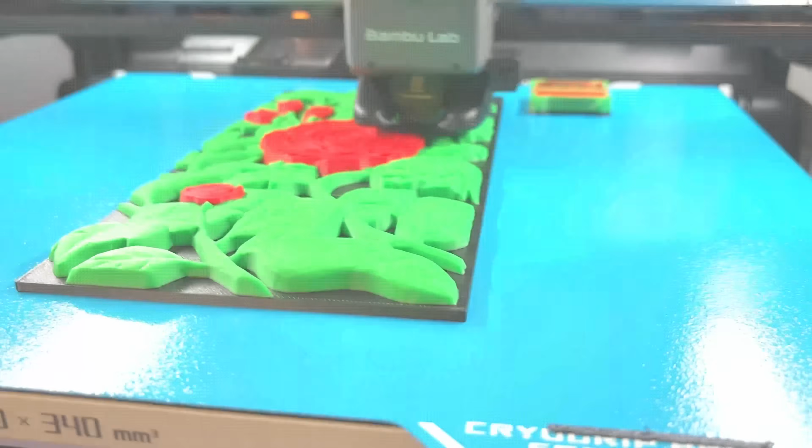In this video, I'm going to show you my workflow on how I use Hitem3D's new 3D relief tool feature to create this 3D printed multicolored piece. And trust me, it's fast and easy and requires no 3D modeling experience. So let's get into it.

The first thing you'll need is an account set up on the Hitem3D AI 3D modeling platform. You can find a link in the description. It's free to sign up and you should have enough credits to at least try this out for yourself without any charge. The second thing you'll need is a multicolor 3D printer, something like a Bambu Lab or an Anycubic printer. Any of the current modern printers usually have that capability. And that's basically all you need.

To make things simple, this video will also have chapters below, and it'll be broken up into 3 main sections. The first segment will cover the images that we need to actually use this 3D relief feature. The second segment will be diving into the Hitem3D AI platform, and the third and final section will be going into the Slicer software and then adding color and sending it to the print.

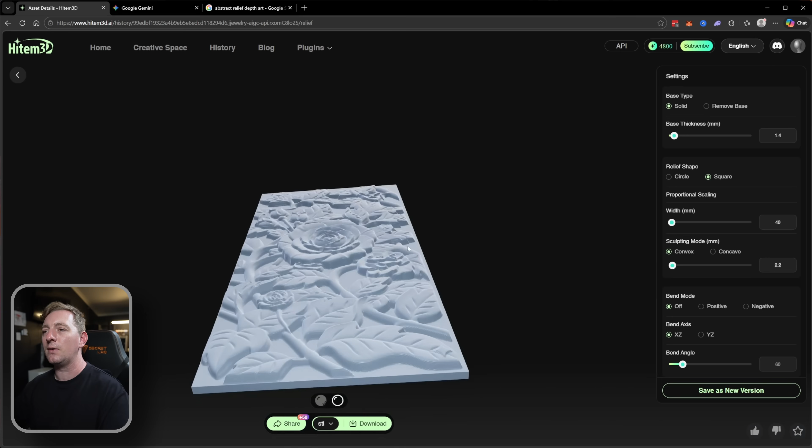I don't want it to be too deep, I just want a little bit of depth. Obviously, the more height there is, the longer this is going to take to 3D print, but not enough height is obviously going to take away all the work we're trying to do. So just play around with that setting, find somewhere that works best for your design. Let's say 2.2 should be fine.

And then finally, we have the bend mode. So instead of being a flat object, we can actually start to curve this around. Currently it's off, so it's just a flat object, but we could make that a positive curve, and you can see it's starting to bend around in that direction, or we could make it a negative curve, so it's now bending inwards.

And we can also change the bend axis as well. So instead of the XZ, we can go the YZ. So instead of bending around this way, we're now bending around that way. And finally, we can change the bend angle.

So we can go all the way to a full tube if we wanted to, or we could go to a positive and basically make part of a cup. That's a pretty cool feature, just doing it like that, bending it all the way around. But let's go back to our off.

And then finally, we need to export this. So down the bottom, we have our export. It's just in STL format, and we can click on download and give it a sec, and that will start downloading. And here is that other example I did with the two hands holding.

So again, we can just increase our thickness a little bit, play around with that. And I think that's fine. We might make this one a circle one like that. And then we will download this.

Okay, so that's it. That's how easy it is to create these 3D relief models. No modeling required, just chuck your image in, play with some settings, export, and then we can move on to the third and final segment. A little trickier, but I think the fun part, which is actually coloring the model and then 3D printing it. So let's get into those details.

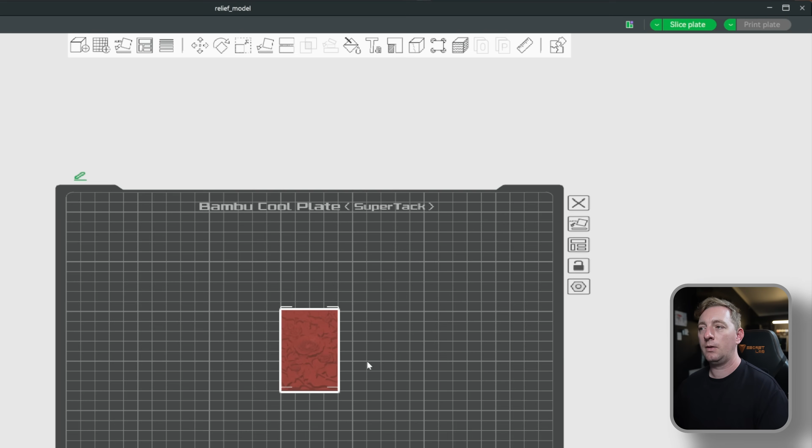So the first thing we need to do is go over to our Prepare tab, and then we need to import our model. So here it is now. Now this is a really small print, so let's scale that up a bit by going to our scale, and we can just increase this maybe 300%. That's probably a good size.

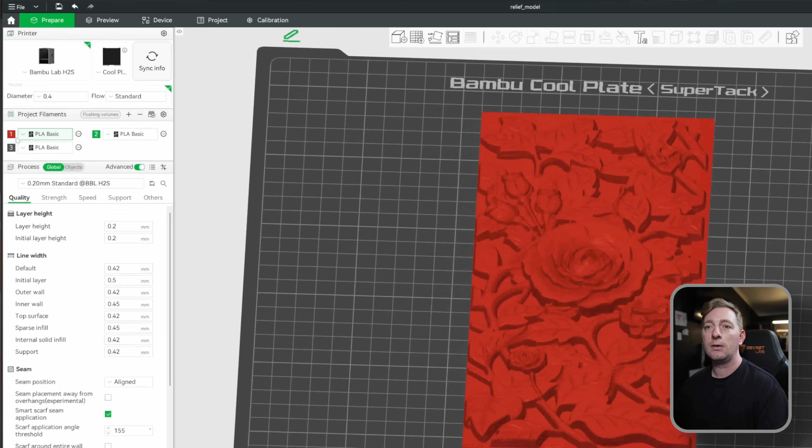We'll also need to set our filaments, which you can do by probably just syncing to your printer. That's what I've got loaded at the moment, but I want to change this around just to demonstrate. So we'll go to a PLA basic. Maybe I want the base to be a black. The second one, I'll want to use probably a green, and finally maybe a magenta color for the roses. So these are going to be the 3 colors I work with.

If you have a 4th color, or if you have multiple systems connected to give you even more colors, then go nuts. You can do all that yourself. But this will just give you the basic workflow to start with.

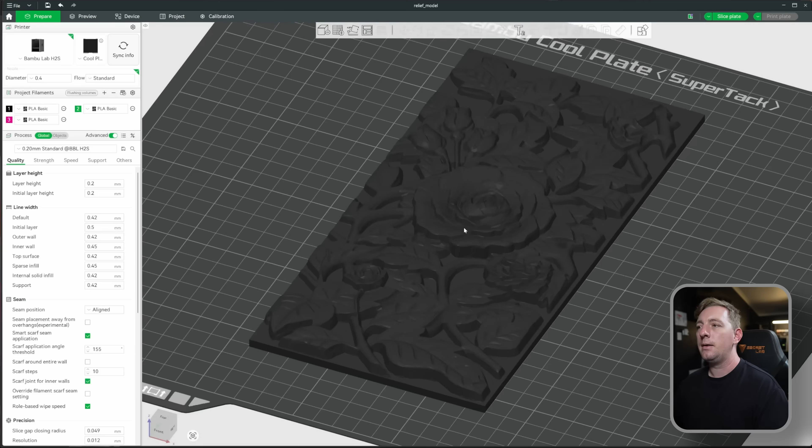Now we can click on our model and go to our painting tools, and we might want to start changing this to green. So you could change your pen size and start painting this in, but you can quickly notice this is going to get really difficult because you start getting overlapping where we don't want it to. We want to keep that base black. And so I found there's a better way of doing this. So we're going to undo that.

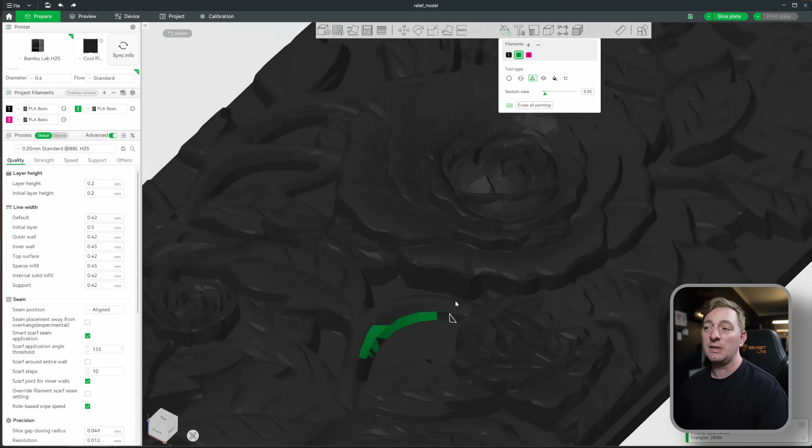We can also try triangles, but you can see these triangles are quite dense. And it's going to take a long time to go through and try and paint all those triangles accurately as well. So that's not a good way. You can try the fill feature and see how well it does, but honestly, it seems to just want to fill in the whole thing. So that's not going to be very good.

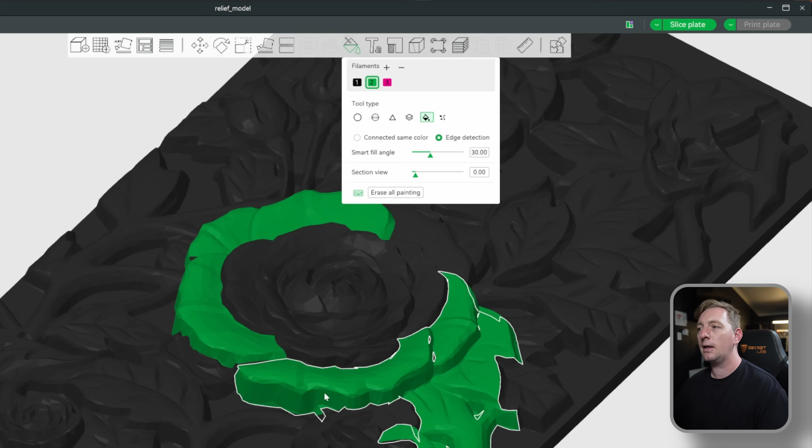We can change that to edge detection as well. But again, it's not really going to work for us in that case. It can work a little bit better here, but still it's cutting into it too much. So there's a trick to this, and let me show you what I like to do.

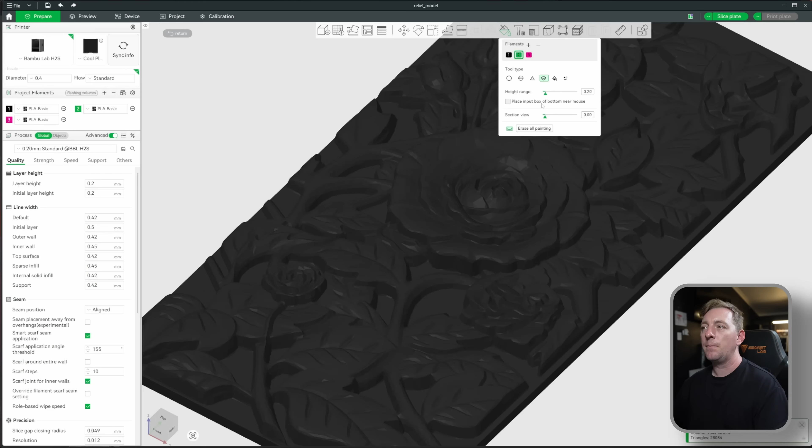So I like to use the height range, and this will basically color everything layer by layer to a height you specify. You can also tell it the range for the painting, which is your height range, and it will actually paint in whole chunks that way. But I like to keep it small, and then I can fine tune where I want it.

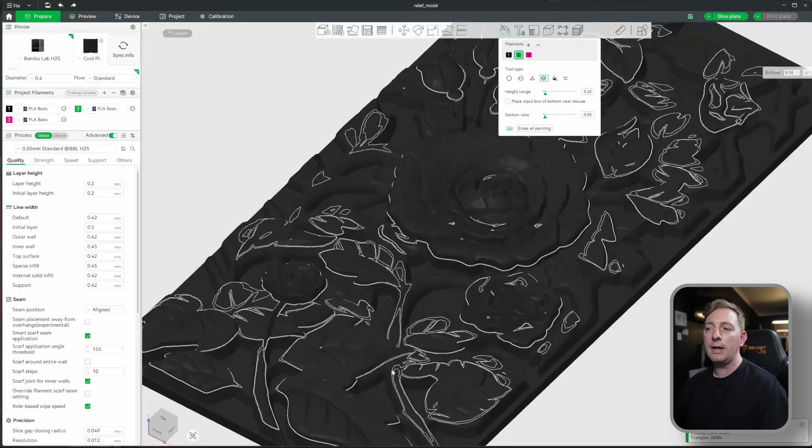The other trick is try and set your main color from the beginning. So what I mean by that is the black is going to be really easy to fill in with our height tool. All the rest, all the green parts are what's going to be the challenging part.

And so we're not sitting here trying to paint this whole thing in green like this. What we can do instead is we'll go back, we'll exit our painting mode. We'll actually change the whole model by clicking on it. And in this case, I've got number 2 is my green. So I can hit 2 on the keyboard and it changes the whole model to green.

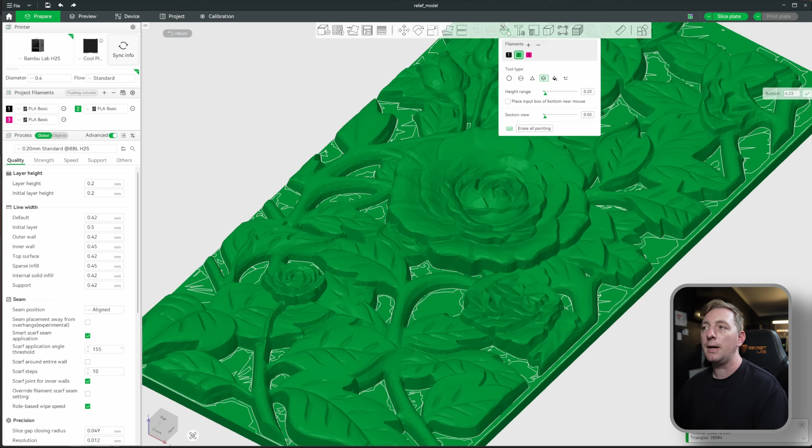And now we can go back to our painting tool using our layer, and we can switch to 1, which is my black. I'm going to look at the bottom of the model, and I'm just going to start slowly clicking and dragging up on the height. So you can see how it's kind of painting it as I go. And we can just go a little bit closer here because I want to basically just finish on this very final few layers where that transition starts.

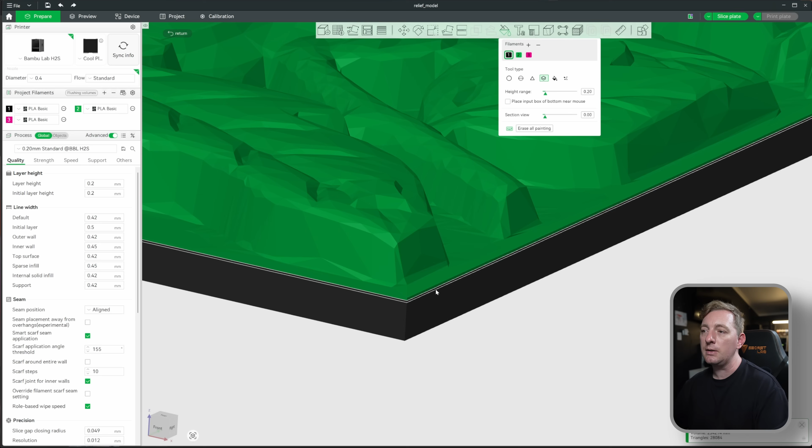So we can click, we can drag it, just painting in that area, little by little, until we feel like we hit that final one. If we have a look, that's pretty much it. We could maybe go one more. So we can just carefully bring it up to there. And I think that's pretty good. So if you look around, just make sure there's no green islands sticking up, which you might want to paint over. But that's how I do the bulk done. That's kind of the easy part.

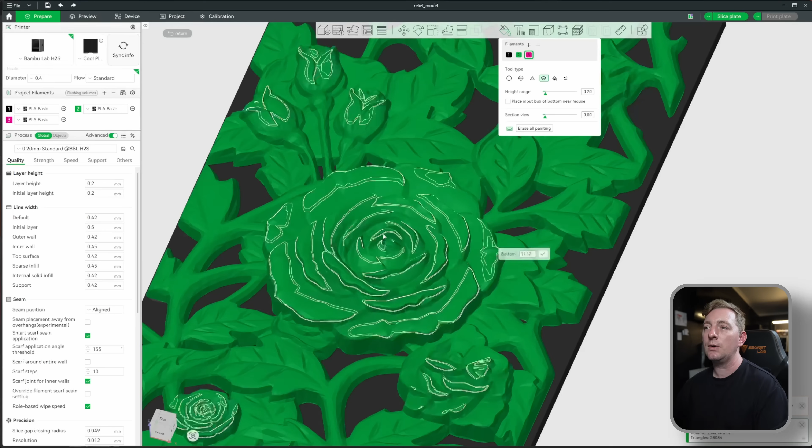Now the next part is the more manual process, which is basically the roses. And you could try and use your height here. So we'll switch over to our magenta, and we could start trying to find the highest point basically. And we could start painting down, and we can see we can't go too much further because it's going to start painting all these areas. So let's just undo. So you can see it's not going to work too well, but that's a pretty cool effect as well. If you want to play around with different ways of doing this, you could do something like that, but that's not what I'm trying to do here.

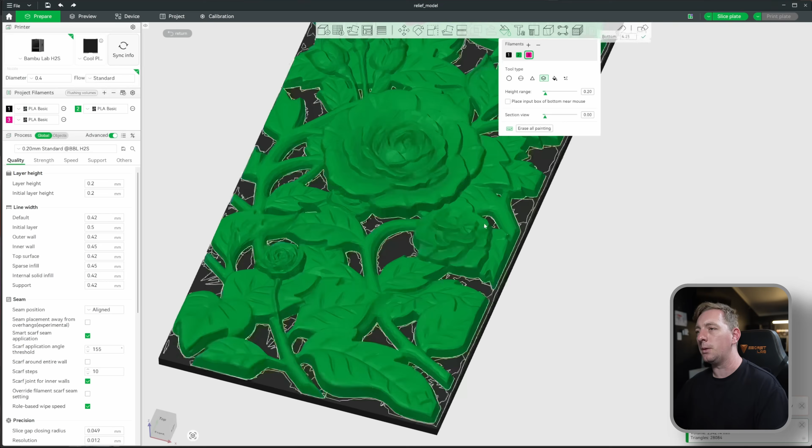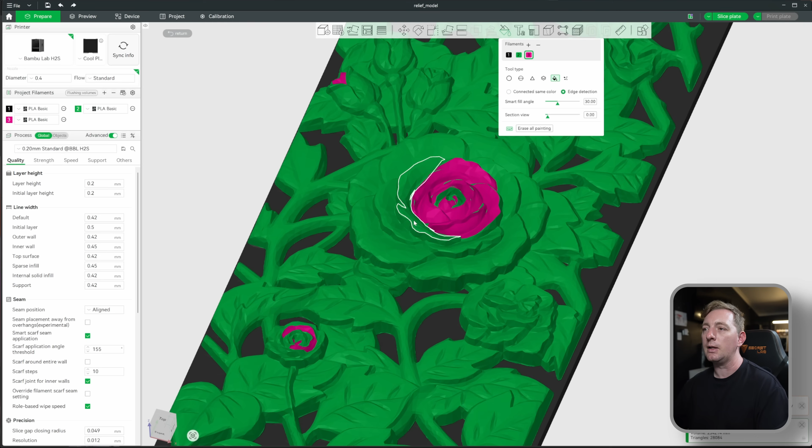We could try our fill tool, and change that to edge detection. And we can just go around. This might work on some of the bigger parts like this, but we can see it's eating into too much. You can see there it's taken out way too much, so it's not really good at that. How about this part? This one's all right because we got some fairly large chunks together, but it's pretty much this process. And if at any point you feel like you're getting a bit lost on what needs to be colored, just bring up that old image that you used as a reference in Hitem3D and have a quick look at it and see where you need to keep on coloring, and just keep going through this process.

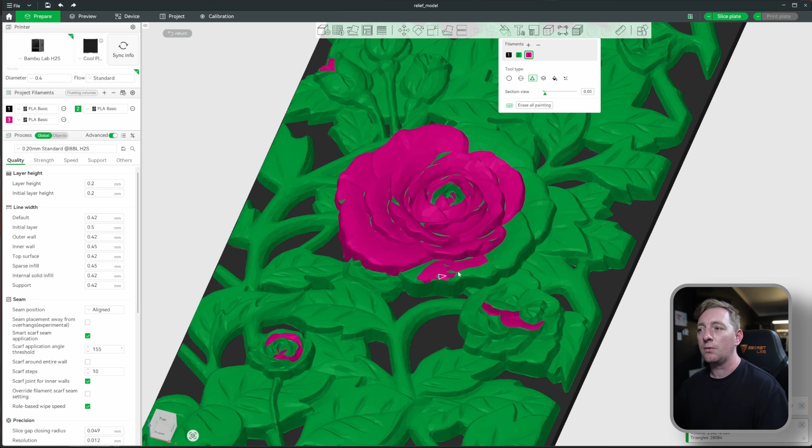So I might also need to start using my circle or my triangle tool I like to use, and just going through and painting this. It's a bit of a slow process, this part, but just keep going through, and then once you're all done, we'll move on to the next section. So I'm going to fast forward through this so you don't have to watch it all, and then we'll come back when it's all ready to go to the printing stage.

Okay, I've finished the painting for this model. Now, it's not perfect. It is quite a dense 3D mesh, so it can be hard to color in some of the areas, especially down the bottom where the triangles are really small. But I found just using a mix of the triangle tool, and you can just go along and kind of paint in the border, and then you can go back and use the fill tool, which will fill in everything within a border. So you can kind of chunk sections out by doing that.

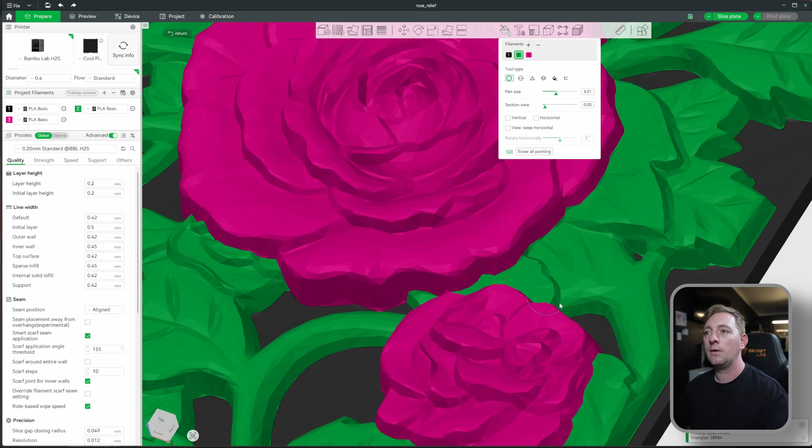And then whenever I want to just make big sweeping painting changes, I can use the circle tool, bring up the size and just do a whole section like this, and then basically just fill it in with the fill tool. So play around with the tools, and that's pretty much how I went about it. And once you're finished, you should have something like this.

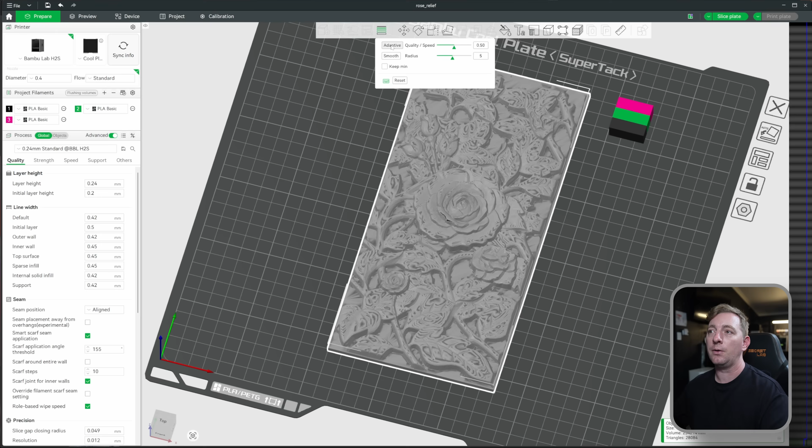Now on to the final part, which is 3D printing. So for this particular model, the settings I like to use is I like to bump up the layer height quite a bit, but then I like to click on the model and go to what's called variable layer height. And I can click on that and click on adaptive and then click on smooth and then just finish.

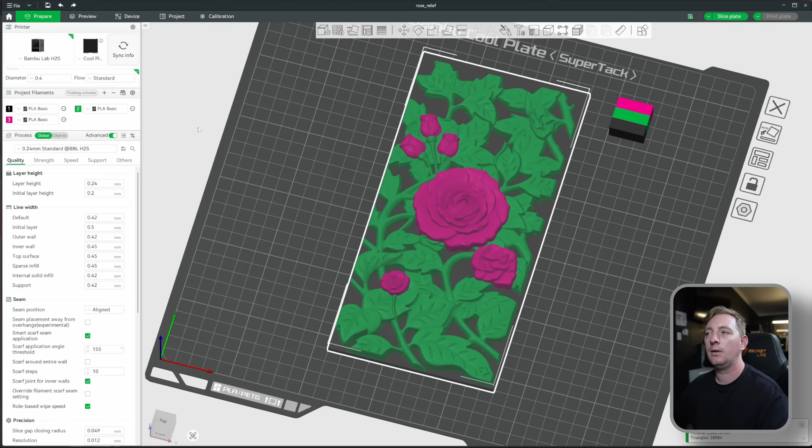What that's doing is you set a fairly large layer height, so in this case 0.24, and wherever it can smooth that layer height out, it will actually use a really small layer height in between, so that's why it's a variable layer height. This allows you to print faster where it doesn't need a lot of detail and there's not a lot of curving, and then add finer detail when it starts to make rounded corners and needs that finer layer height. So it's a mix between detail and faster printing, but overall it does add a little bit of extra time as well.

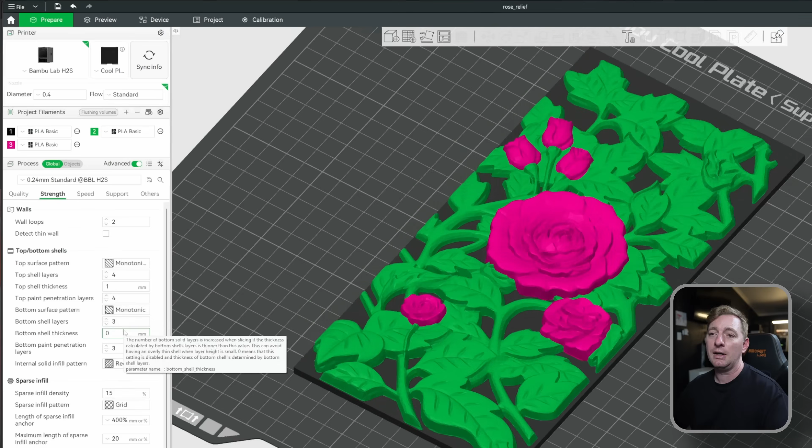Now we're not going to need any supports, which is good for this particular print because it is just printed flat and everything is going up, so there's really nothing to support. And for strength, this isn't a structural kind of print, so we can cut down on the infill and try and save some material as well. For my sparse infill I like to use crosshatch, and I like to bump that down to probably 10%. And then we can just click on slice plate. Our slice is done, and this has a total print time of 9 hours, and it's going to use a total of 155 grams of filament.

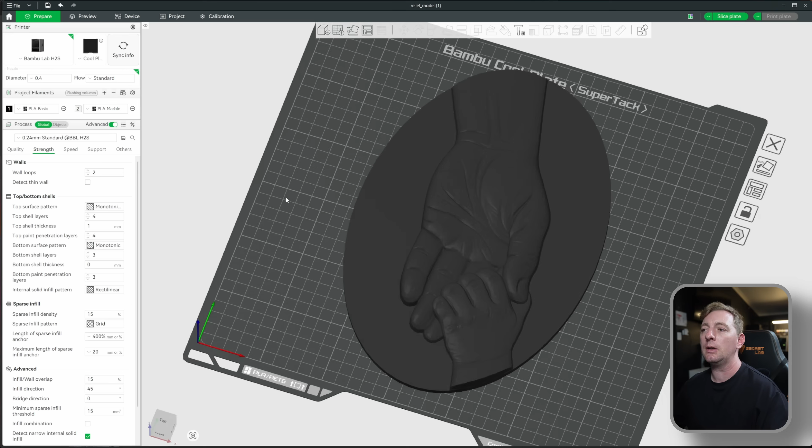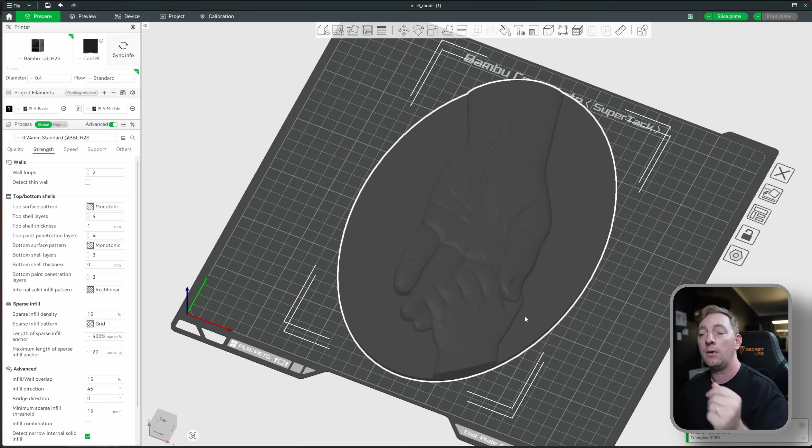I'll show you one more example of painting your model because this one will be super easy. We're just going to use 2 colors. For this hand holding relief model, we'll use a black base and then a marble for the hands. What I want to do first is use that painting trick with painting by layer, and reverse what it currently is, because it's going to be a lot easier just to paint the base as far as I can using black. So I want to make the main model my PLA marble. I can just hit 2, and that's going to make everything marble.

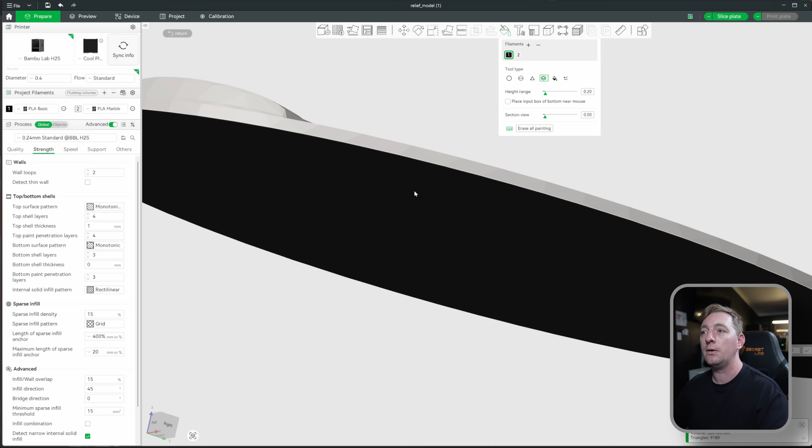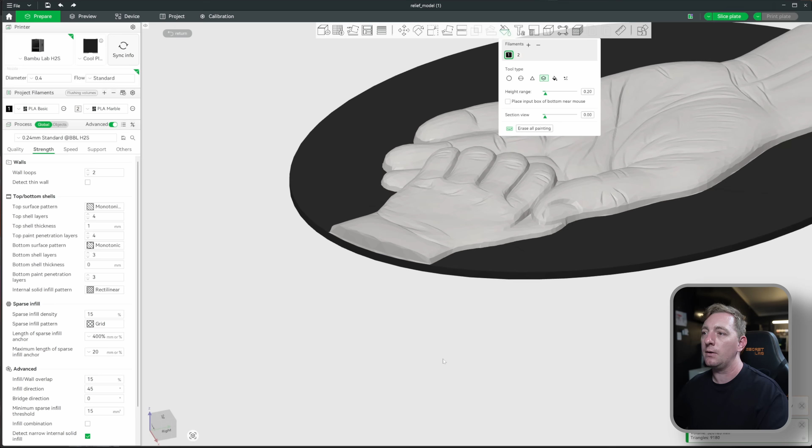Then I can go into the painting tool, switch to my number 1, which is my PLA basic in black, and use the height range tool. Look at the bottom of it, start on the very base of the model and just click and drag, slowly bring it up as far as I can, and stop there. Then I'm going to look from the top a little bit more so I make sure I don't go too far into the hands, and continue clicking and dragging up slowly until I can see it's starting to eat into that top layer. A little bit more, maybe one more, and one more. I think that is pretty good right there; that's where we can leave it.

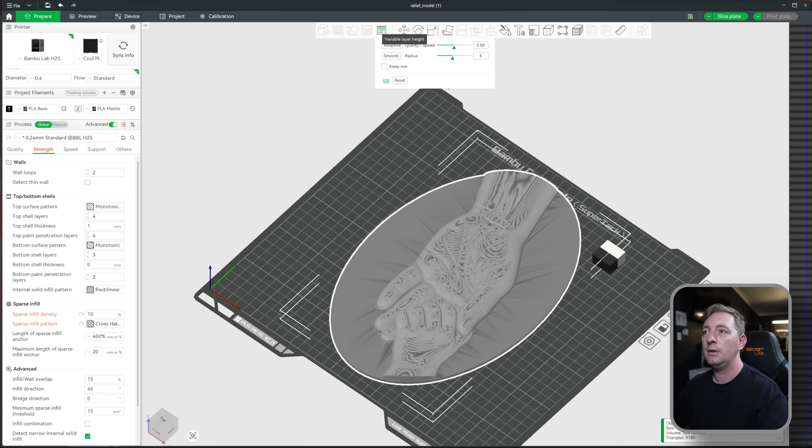We can click on our painting tool, move this block out of the way, and that's pretty much it. I need to change those settings again, so I'm going to change my infill to crosshatch and drop that down to 10%. I'll click on the model, go to my variable layer height, making sure it's on 0.24, and set the variable layer height to adaptive and smooth. All that green area is where it's going to change to a really small layer, whereas it's going to use quite a large layer on the base. It'll quickly print through the base, then slow down as it uses a finer layer height. Click again on the tool, and then we can simply slice and send that off to the printer. So that's been my workflow on using the new 3D relief feature in Hitem3D 3D.